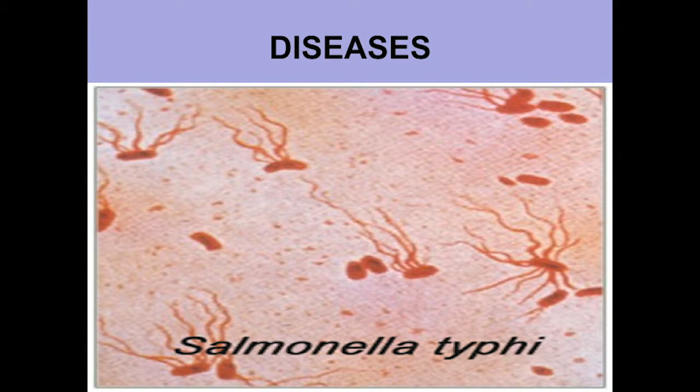But human health threat is the primary concern with septic systems, and that's why it's the Department of Health and Human Services, Division of Environmental Health, that has jurisdiction over septic systems in the state. Lots of things in wastewater are not nice, and we want to make sure we take care of those and they don't have any effect on people besides lake water quality.

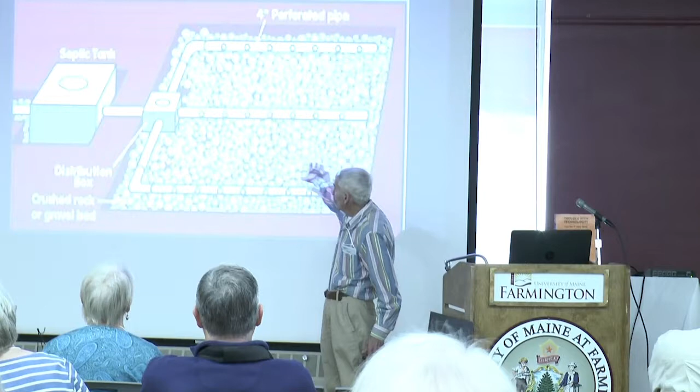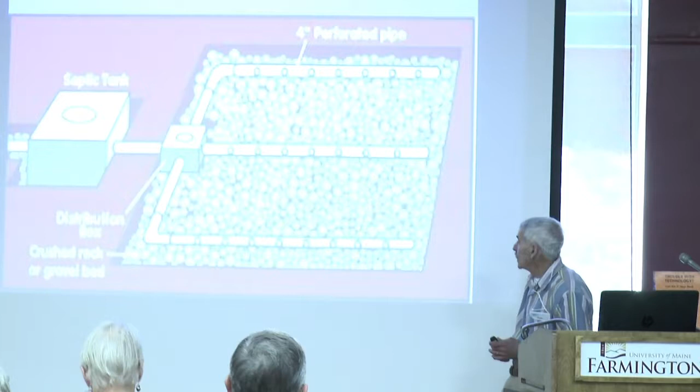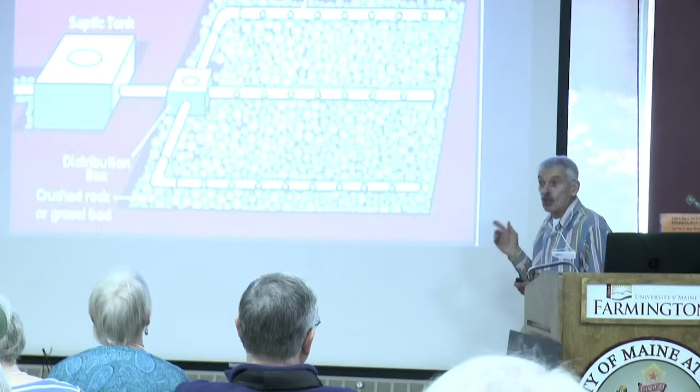Now, I'm sure most of you know what a septic system is. I'm going to go over briefly what they are because there's lots of different kinds of products out there today. A septic tank and a drain field are the two primary components. The distribution box spreads the water out over the drain field more or less uniformly. The standard drain field was always made with crushed rock. And the footprint is pretty big because the purpose of the stone in a drain field is what? Anybody know what it is?

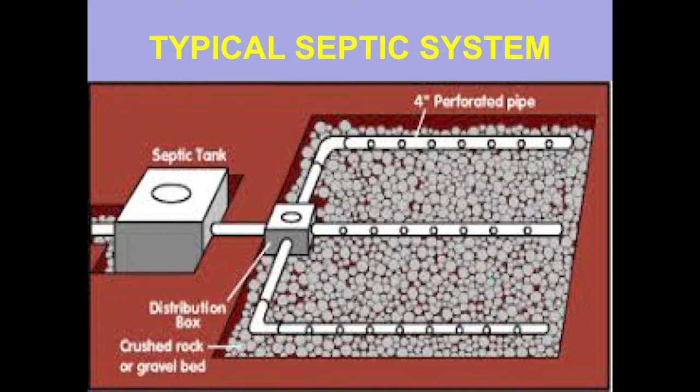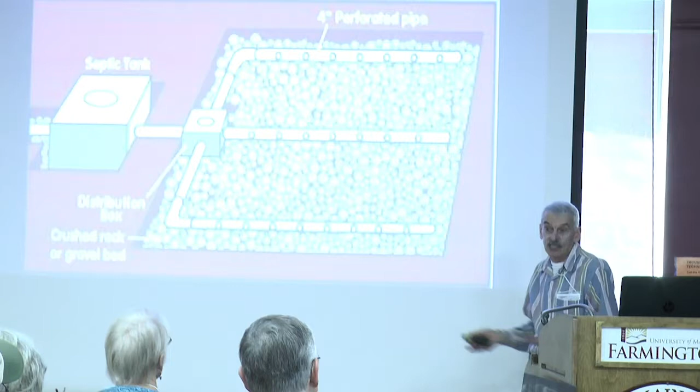What's that? To distribute. No, it's to hold the water, because a standard 3-bedroom home generates about 300 gallons of wastewater per day. But when is it generated? In the morning when everybody gets up and gets ready for school and work, and when they come home. So you put a lot of water out there, probably faster than the ground can absorb it, so you gotta have a place to put it. So in a stone bed, half the volume is stone and the other half is pore space. It's basically to hold water until it can drain into the ground.

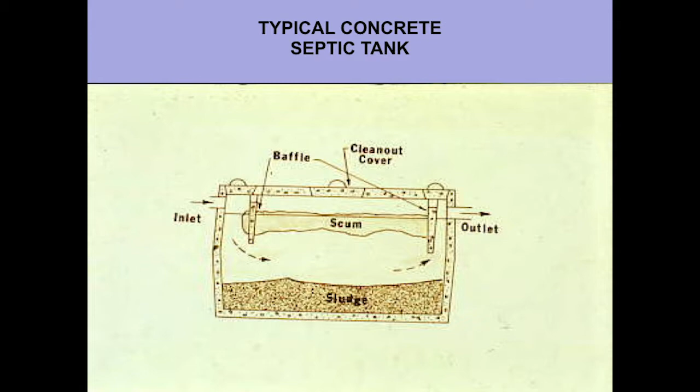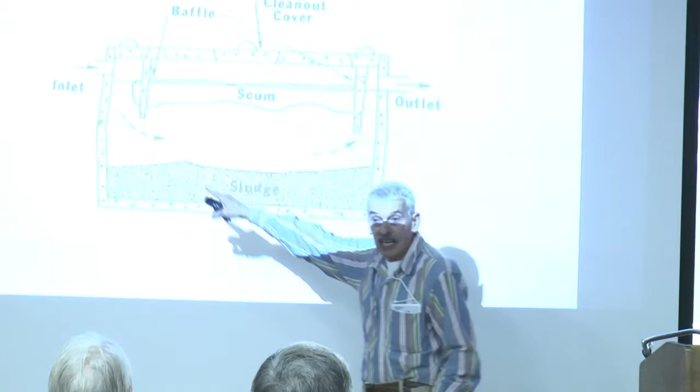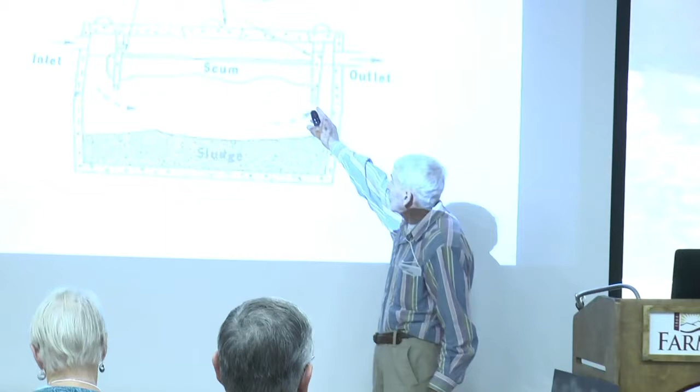Septic tanks have been around for a very long time, and they're very simple and very effective. Their purpose is to collect things in the water that are heavier than water and sink to the bottom, and things that are lighter than water and float to the top. There's a baffle on the inlet end, designed to slow the velocity of water down when it comes into the tank so it doesn't stir things up. And at the outlet end, that baffle is extremely important because if that's not there, all that grease and stuff goes out into your drain field.

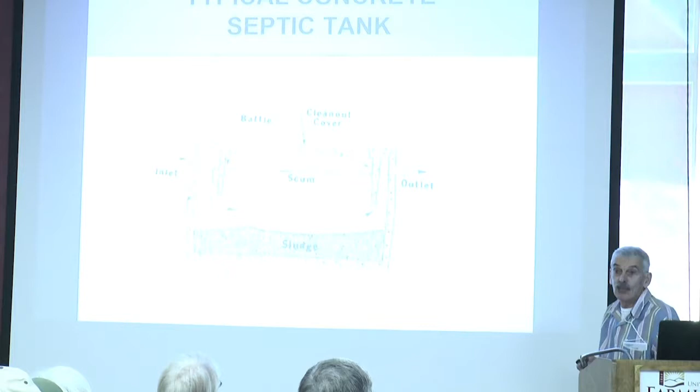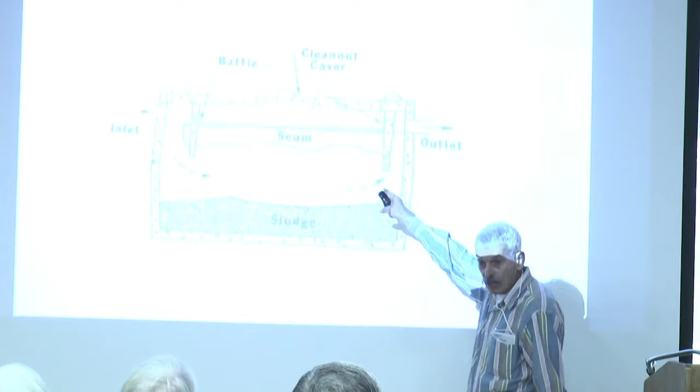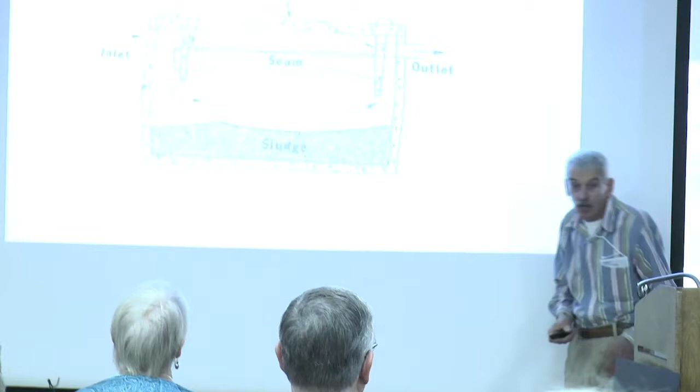So by all means, every time you have a septic tank pumped, make sure they check the outlet baffle, because that is critical to the functioning of a septic system. And if that is concrete and it corrodes and falls off, it's really easy to fix with 2 pieces of plastic pipe making it into a T. A piece comes out here, a piece comes up here, a joint goes up a little bit above here, and not a problem. But without that, your drain field will fail.

The other thing people don't understand about septic tanks is that they're not designed to remove all the particles in the waste stream. They remove a lot, but not all of it. For one thing, the effluent in the tank becomes anaerobic, and so decomposition is slow. So you need to pump it out every 3 to 5 years. If you don't do that, your $10,000 or $20,000 drain field system may fail. So pumping it out more often rather than less often is a great idea.

And they make plastic septic tanks if you happen to be in a tight spot that's hard to get at and you can't get a concrete tank in. And a lot of septic tanks these days have filters on the outlet end. The purpose is to remove some of the fines, particles that might escape out into the drain field.

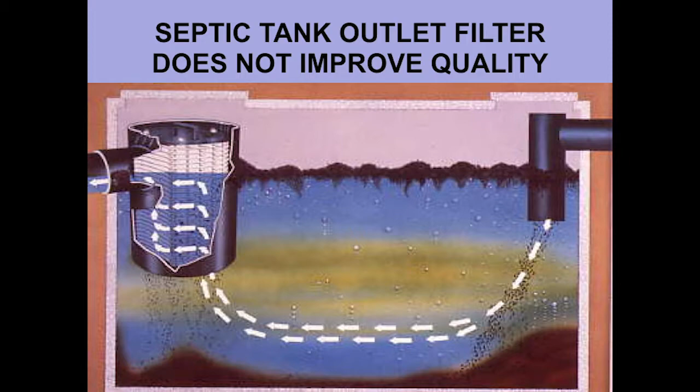My personal opinion of those septic tank outlet filters is mixed. If they put a filter in fine enough to really remove most of the particles, it would plug up so often that you'd have to have it cleaned constantly, and people wouldn't do that. So they're a little bit too coarse. I think if you understand your septic system well and how it works, then they're not as important, but they don't do any harm. And for most septic tank manufacturers, that's standard in the tank.

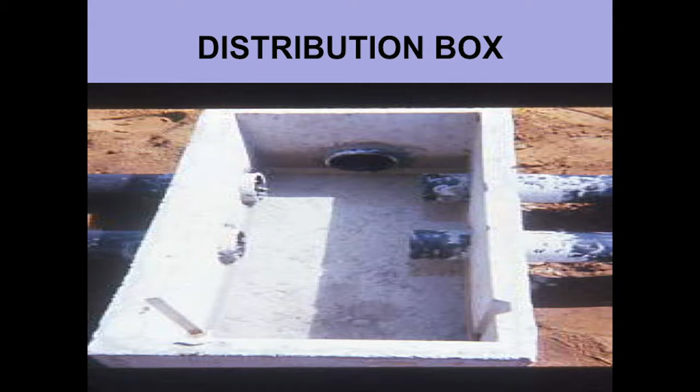And the distribution box, you know, it's designed so that water goes out each of the pipes into your drain field, hopefully equally. In reality, most of these distribution boxes tip a little bit, so they don't really distribute it equally, and it's really not that critical. In my opinion, their biggest function is an inspection port.

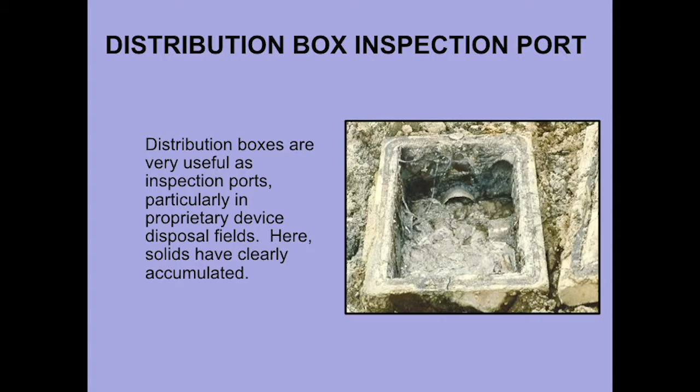There's not supposed to be grease and junk in these things. So if you've got a septic system that's made out of plastic chambers or concrete chambers or something that somebody can't dig a hole in to look at easily, if you get a distribution box and it's full of stuff, then you know you got a real problem. That's not supposed to happen.

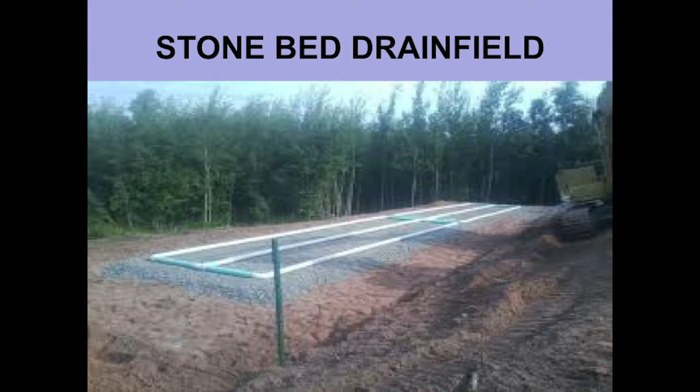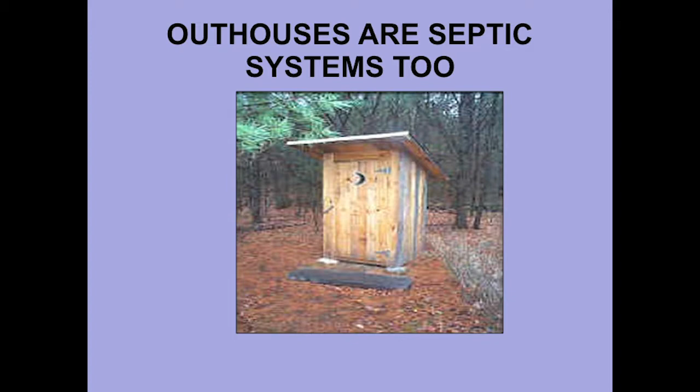This is a typical stone bed with the piping in it. Water comes in and goes over the whole footprint of the disposal field eventually. And a lot of people don't realize this, but that is a septic system. That's the same thing as a drain field for the black waste, and that works just as well as the drain field. In fact, it's a better system than a septic system drain field, because the way that contaminants move from one place to another is with water, right?

You gotta have water. Well, if you got this little building sitting up on top of the ground, so rain doesn't even get at it, then the stuff sits there and composts, and it's actually superior. So people say, all I have is an outhouse, I don't have a septic system. You have as good a septic system as there is, in my opinion. But that's only half your system.

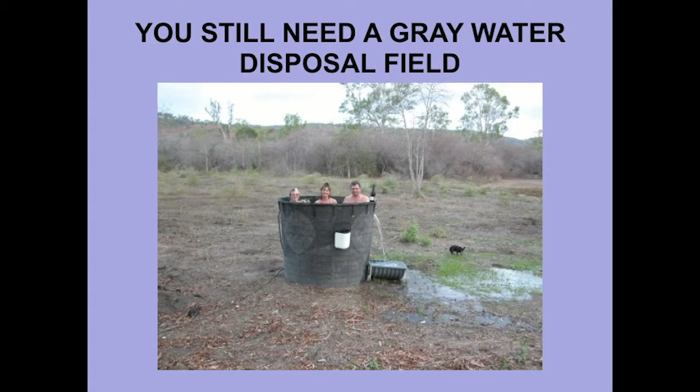You still got to get rid of the gray water, the sink water, the showers, the bath water, and that's probably not one of the ones in the septic system rules, but you still got to have something like that. The septic system design that we use today was first started on July 1st of 1974.

And we call it site evaluation because people are trained to go out and look at conditions and not do what we did back in the good old days, which was a PERC test. For a PERC test, you dug a hole in the ground, you filled it up with water, and you timed how fast the water disappeared. Believe it or not, if you dug the hole last year, it probably disappeared faster than it does this year because it's wet, or the spring, or the fall.

So with that system, if you went out in April and did a PERC test and it didn't pass, you said, well, I'll come back in August and do it, now it'll pass. And that doesn't work because your septic system has to be functional all year long. So today, we train folks to be able to look at soil colors and other features and be able to tell how it'll work all year, including in the spring when the water table is high.

The things that we look at are soil texture. Obviously, a septic system on clay soil is going to drain slower than on sand. We look at soil structure. Water goes through the soil through soil pores, and soil pores are created by soil structure. If you don't have good soil structure, you don't have a lot of pores, and the water can't go through the ground very easily. So healthy soil with good soil structure is really important.

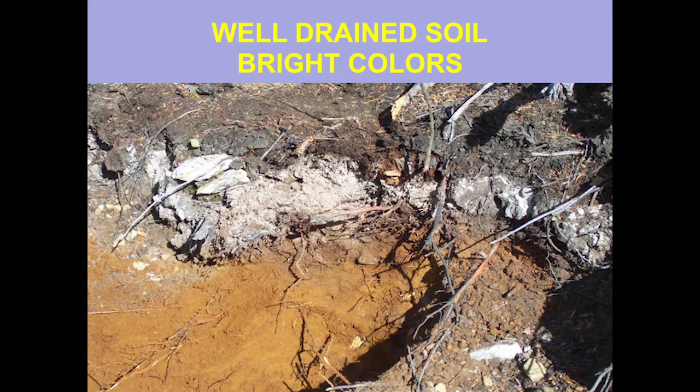And a little quick lesson in soil morphology. All of our soil in Maine, and pretty much most everywhere in the country, has a lot of iron in it. And if the iron is exposed to oxygen, it rusts. That's what that bright color is all about. It's rusted iron. So if you've got soil with bright colors and good roots, you've got a soil that's well drained, there's not a water table, that's a good one to put in for a septic system.

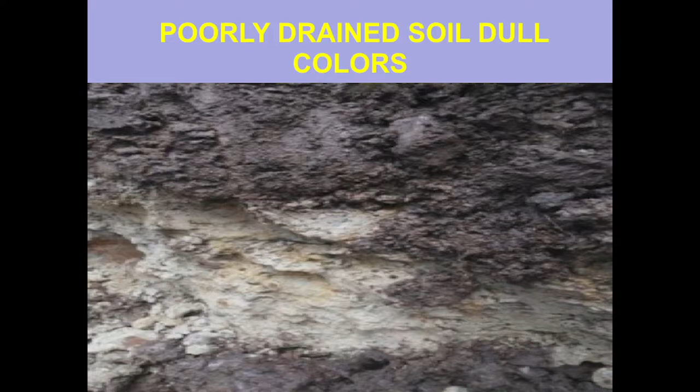On the other hand, if the water table is there for any length of time, microbes that are breaking down organic matter in the soil, they need oxygen. They get it from the soil air and the soil pores if they can, because that's the easiest place. If the water table comes up in the soil and it's not there for too long, there's oxygen in that water, that's the next easiest place for microbes to get it.

If you've got a soil where the water table comes and goes, then you get these gray spots with brown soil color, and I can tell you how long the water table is there by what is the predominant color. If it's more brown, then the water table's not there long, with just a few gray spots. If it's mostly gray with a few brown or red spots, it's wet a long time. That's how we can tell.

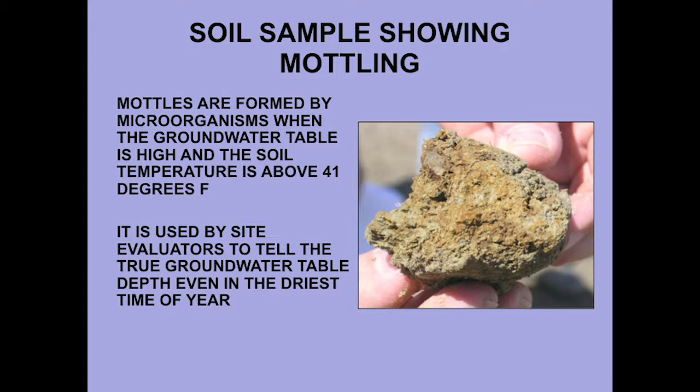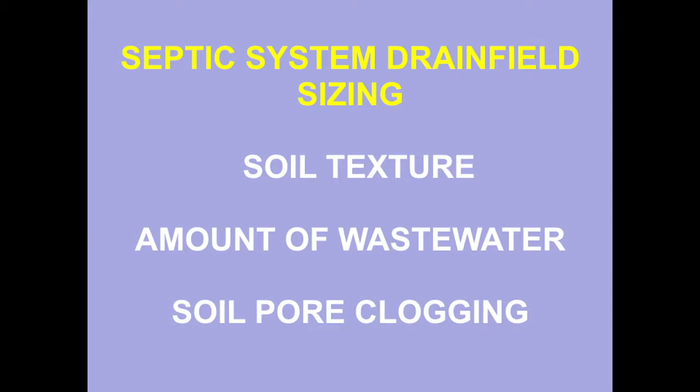For septic system sizing, there are 3 considerations that you have to be aware of. One of them is the soil texture. Like I said, clay soils, you need a big system. Sandy soils, you need a smaller system. The amount of wastewater being generated obviously matters. And then there's the clogging of the soil pores, because some particles escape from the septic tank, and the microbes that are decomposing that organic matter form what we call a biomat, which causes some clogging of the soil.

In my business, it's called the long-term acceptance rate. That's why you need a big footprint to put not that much water into the ground, because it gets this biomat. And I can tell you the biomat is a very important component for treating wastewater, because it really works hard, and probably 80 to 90% of the wastewater renovation is by that biomat. And I'll be talking about that a little bit more as I go on in this talk.

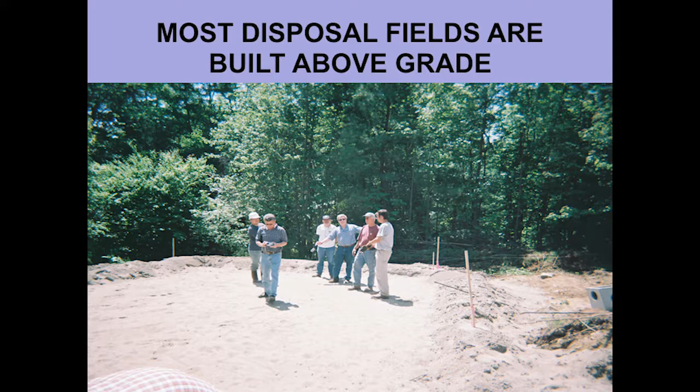Most disposal systems in Maine are built above the ground because we have shallow depth to hard pan, bedrock, or water table. Traditional stone beds are being replaced today more and more by what we in the business call proprietary devices. And I'm going to show you what some of those are, because they use a smaller footprint and they can go in a smaller area, which is really pretty important.

Another thing is that in a stone bed, as I said, half of the volume of the stone bed is solid stone and the other half is pore space. Well, if you've got a concrete chamber, all the area underneath it is available to hold water, so you can hold more water in a smaller area. And one of the other things that happens is some of these proprietary devices help reduce the organic material in the waste stream. If it's cleaner water, it can go into the ground quicker, so you need a smaller footprint.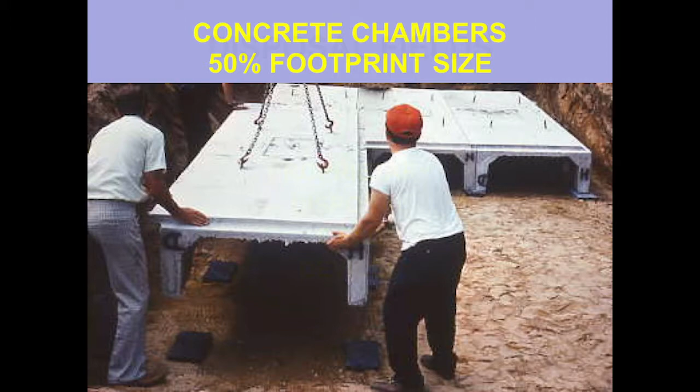So some of the proprietary disposal field devices, concrete chambers, have been around for a very long time. And now you'll see more often these plastic chambers that are very lightweight, and not only can they hold water without soil or stone reducing the volume, but you can put them in rows and step down the hill.

So water comes into this row, fills up if it needs to, goes out this pipe into this row, and if it needs to, can come down and down this row. And by doing that, you can have a sloping site with 3 rows and save a lot of fill. If it's a stone bed, it has to be perfectly level, so you'd have a lot of fill, and it looks like a ski jump, so people like these because they take up less room.

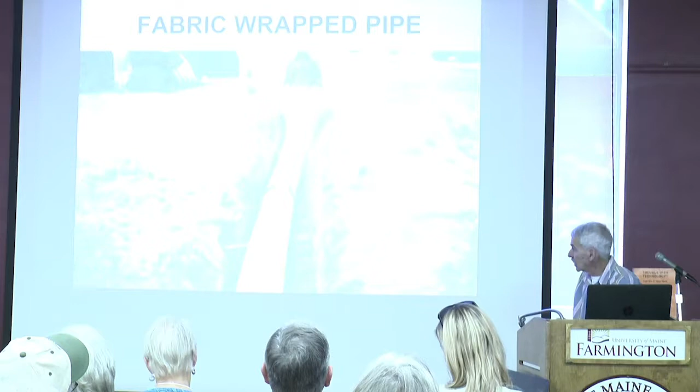Fabric wrapped pipe is another proprietary device. It works like the plastic chambers, and they can be stepped down the hillside. The concrete chambers, plastic chambers, and these fabric wrap pipes will take up about half as much room as a stone bed, so they fit a little easier and take a lot less fill, which is good if you're on a small lot.

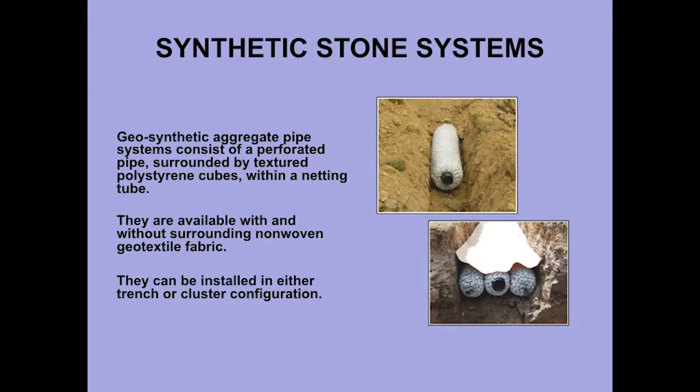And that's showing it stepped down the hill. Here's one that I get a kick out of. They've got a pipe in here, and this is styrofoam beads with a little netting material around it. So basically, you're getting pipe and stone in one package instead of putting stone around it yourself. I'm not sure how many people use those.

There are other proprietary devices that require only 25% of the footprint of a stone bed, so they can really fit in a very small area. They are very popular around lakes and other small lots. Eljen In-Drain is one of those kinds of devices.

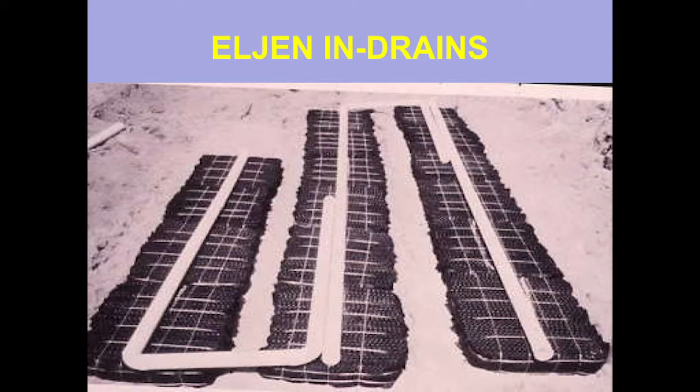It has fabric that weaves up and down in between like egg carton projections. What happens is the wastewater goes down, and if it hits the bottom of the ground, like in the stone bed, it can plug up the pores, as I told you, and that slows the water down. Once the pores start getting plugged, a little bit of effluent will pond on it, so it's anaerobic, and that biomass doesn't really decompose.

While with this fabric going up and down in this product, when the wastewater goes down, particles cling to that fabric that's sitting up like this, and so the water drains down, exposed to oxygen, and that decomposes that organic matter. So by the time the water gets down to the ground, it's pretty clean, and because it's pretty clean, you can put it into a smaller footprint than you can if there's a thicker biomat. So its biomat forms in the product itself, and that's why it can be such a small footprint, and they work pretty well, I have to say.

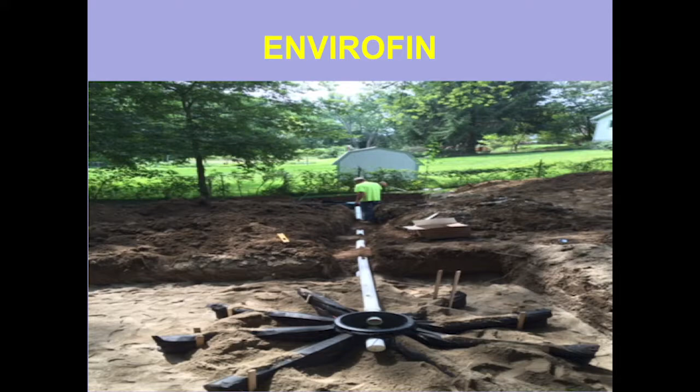There's another thing called EnviroFin that looks like an octopus, and water goes out into each of these little fins. It's got fabric on it again, so the water comes out and drops down, but particles collect on the sides, and that also decomposes the material, so you have cleaner water going out into the ground. So those things can be put in pretty small footprint areas.

Do any of these new design systems allow being any closer to the lake? No. Do they change that specification at all? No, they don't. I'll get on that subject in just a minute.

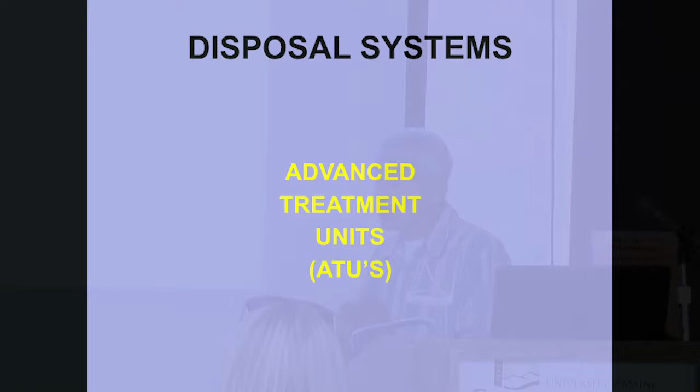The next subject, called advanced treatment units, is what the state septic system program requires if you're going to be putting in a system that's closer to the lake. You can't do this for first-time systems, meaning you never had one before — those have to be 100 feet from the lake. For replacements, you do the best you can, but if you have a replacement system that's going to be closer to the lake, river, or stream than 100 feet, they require you to put in what's called an advanced treatment unit.

And these are basically just like your commercial treatment plant — that's what they are, a little packaged treatment plant. There are a few systems out there that just introduce oxygen into the waste stream, which helps break down organic matter, but some of these actually look like little packaged treatment plants. Their primary function is to reduce the BOD5 and total suspended solids, so it's cleaner water coming out. They can get rid of some bacteria, and they can also reduce the nitrogen if that's desired.

Excuse me, what's a BOD5? Pardon? BOD5, what is that? Basically, it's just the organic material that's going out into the waste stream, so if there's no organic matter, it won't plug up the system as quickly.

So they allow you to put in a very small footprint, 25% of a stone bed, but they also don't have a biomat. And like I said, in my opinion, the biomat is a good thing in that it provides a lot of treatment of the wastewater stream. The price ranges for a lot of these is probably in the $2,000 to $5,000 range. And there's one that's $20,000 — it's reverse osmosis. The people who sell it will stand with a glass on the other side of the membrane and drink it, but I'm not there yet.

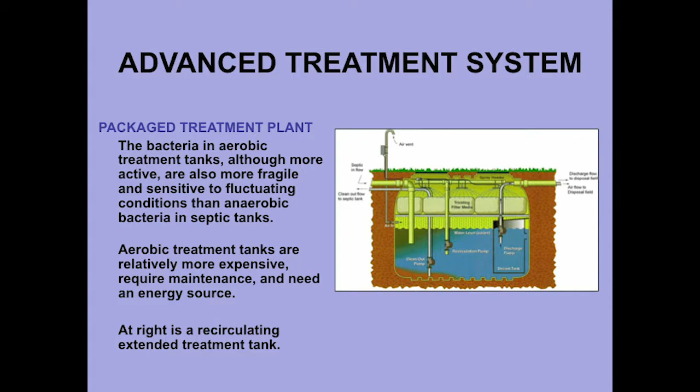So basically, an advanced ATU is something you can get installed in a septic tank, a 1,000-gallon septic tank. What they do is pump up water and spray it down onto bags of foam or beads, where the microbes attack the waste stream. It drips down and keeps doing this until the water's pretty clean, then it gets pumped off to the drain field, removing a lot of the organic material from the waste stream.

This is just showing you another one that pumps air into the tank. If you put oxygen into it, you'll get more decomposition.

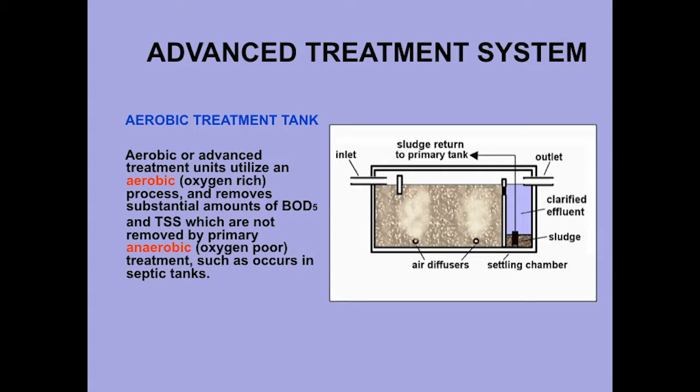It's very critical that if you have one of these advanced treatment units, you have a maintenance contract. The state requires that for a period of 2 or 3 years, but in my opinion you really need to do that indefinitely, because nobody knows how to maintain these things. If they don't get maintained, you're probably going to have it fail, and if it fails, it can be a pretty expensive price tag.

This gives you an idea of one of those advanced treatment units: the BOD5 and total suspended solids, which are the organic components, show a 95% reduction. They can get rid of a lot of the nitrogen and even the coliforms. What you don't see up there is phosphorus and viruses, and as we know, that's important in lake watersheds.

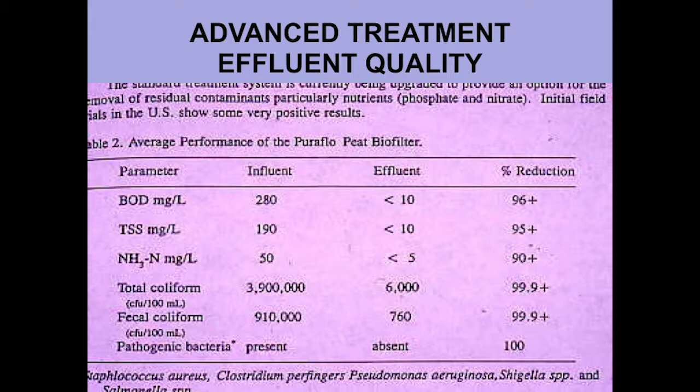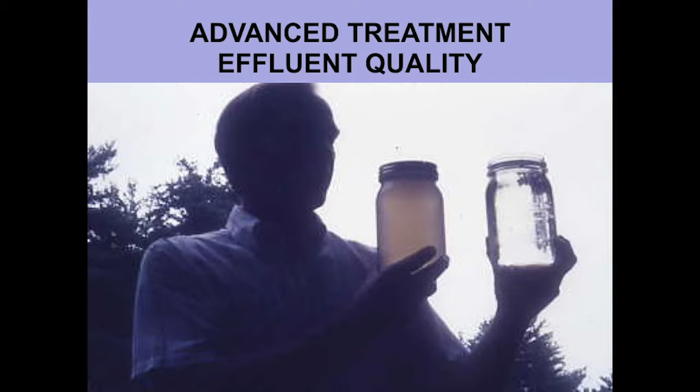This is what the water looks like after it comes out of one of those advanced treatment units compared to coming out of a regular septic tank. It looks like there's a world of difference, and there is, as far as clogging material goes. But as far as I'm concerned, it's kind of deceptive, because you think that's great, but it's maybe not as great if you're in a lake watershed.

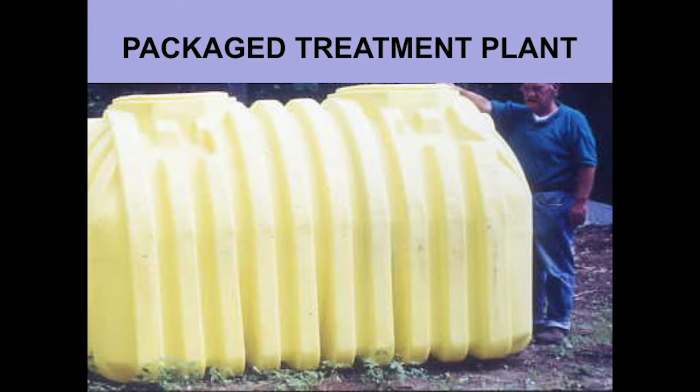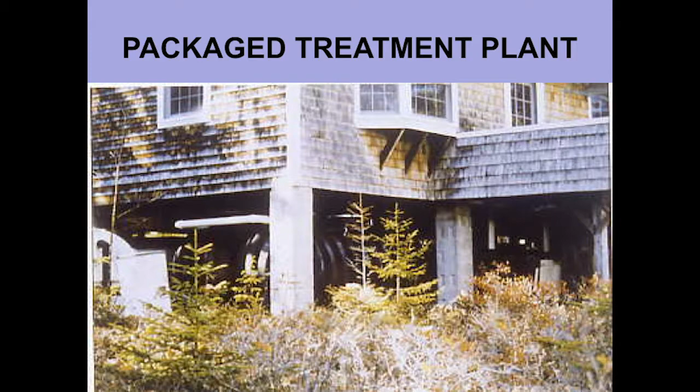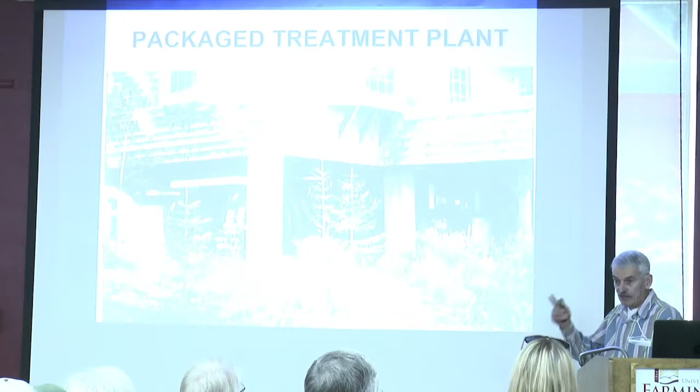These units can, after the season's over in the fall, just keep pumping the solids until they break it down, so you don't even have to have the septic tank pumped out on the islands. It just works itself until everything's clean, and then they shut off for the winter.

This is an emitter for drip irrigation type systems, which are allowed. They can either be put on top of the ground, underneath bark mulch or wood chips, or put shallow into the ground. There are 2 different kinds of systems that are out there.

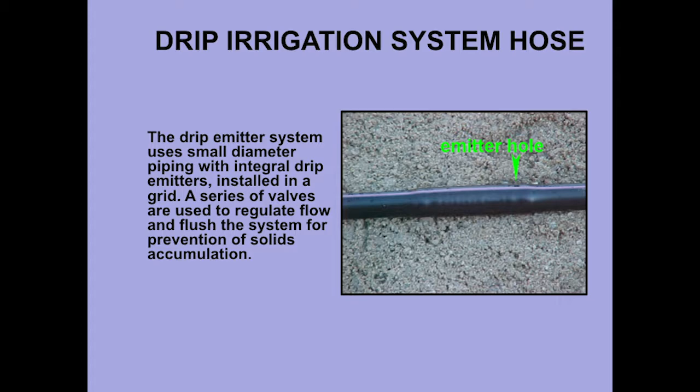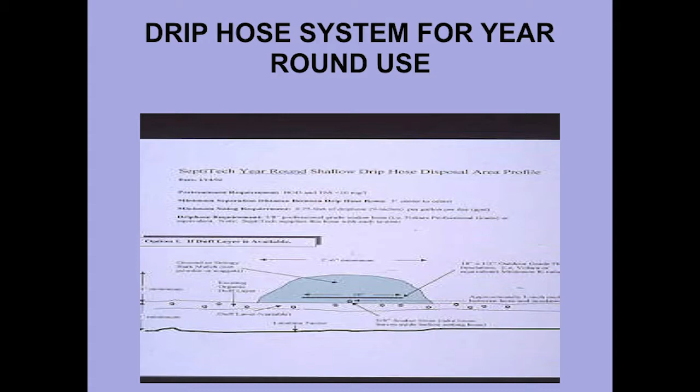This is just showing one that has - let me get a better picture. This is the network of piping for one that's going to be covered with soil. And this is one that actually has bark mulch; it runs off down through there, and that's what that system looks like.

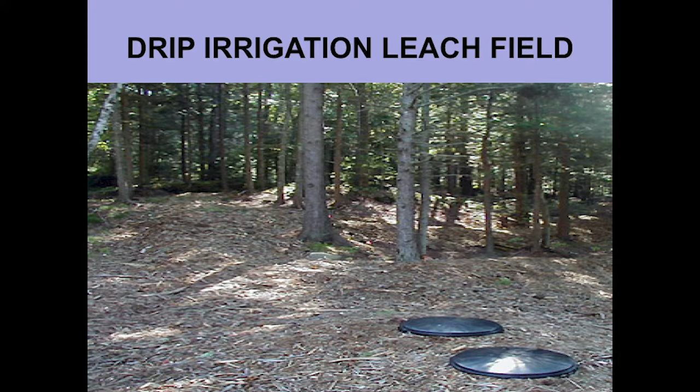So if you're on an island and don't have much room to work, you can put one of these things down, cover it with bark mulch, and they work pretty well.

There is one - when I went to the Maine Association of Site Evaluators annual conference this March, I talked with all the vendors out there. One of the vendors said they have a product that will do that, but it's not available in this country yet. It's available in Europe, and it uses some kind of iron-aluminum slag material that pushes the water through to remove the phosphorus. Apparently it works pretty well for an extended period of time. I told them that if they made that available in this country, they could get a lot of business. So hopefully they're looking into it.

I mentioned about the viruses.

Phosphorus and viruses, as far as I'm concerned, are not a real big concern if the disposal field is installed in the topsoil layer or in a fine textured soil. In all of our soils in the state of Maine, even our sands and gravels, when the glaciers first melted and left, the ground was bare for a long time before it got vegetated, and there was a lot of wind that blew a lot. So even our sand and gravel have a topsoil layer. It can be 6 inches to 2 feet thick of wind-blown, very fine sand and silt, that does an excellent job of providing treatment for wastewater.

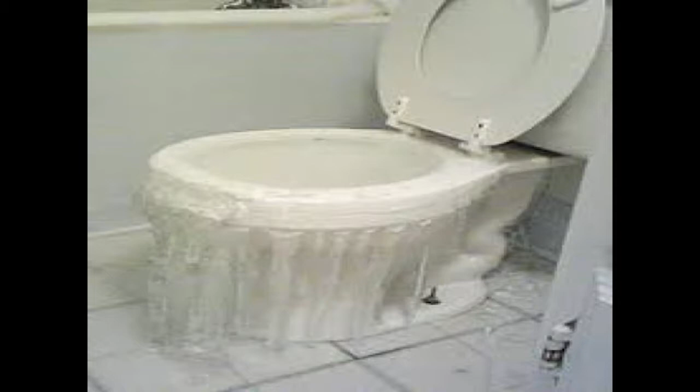Hydraulic failures are probably our most common type of problem. Short circuits is the one that nobody even thinks about, but is probably the one that's the biggest problem. Like I said, plugged pipes are not really an environmental threat - if your pipe plugs up and your toilet runs across the floor, you're probably going to fix it, right? But the hydraulic failure is the one that happens most often and can be an environmental threat depending on where it is. If it's on your front lawn and effluent comes to the surface, you're probably going to fix it because it doesn't look good, it smells bad, and the dog will roll in it and come in the house. If it's out back in the bushes, you may not.

So the three reasons why it can fail hydraulically are because it's not designed properly, it's not installed properly, or it's not maintained properly. Design and installation are not a problem today, generally speaking, because we have lots of training out there.

It's the maintenance part that's really an issue that people don't understand. I brought copies of what I call septic system user notes, what I've accumulated over my career in understanding about septic systems that homeowners should know. Everybody who has a septic system should read it and understand it.

What are the signs of a hydraulic failure or other type of failure? Like if, as part of a lake association, a homeowner says they think their septic system is failing, can you take a look at it? You'll have a soft, spongy, soupy thing that you'll see. Those are pretty easy to find.

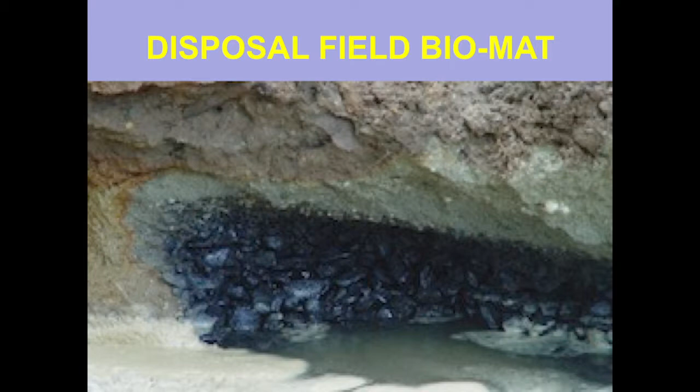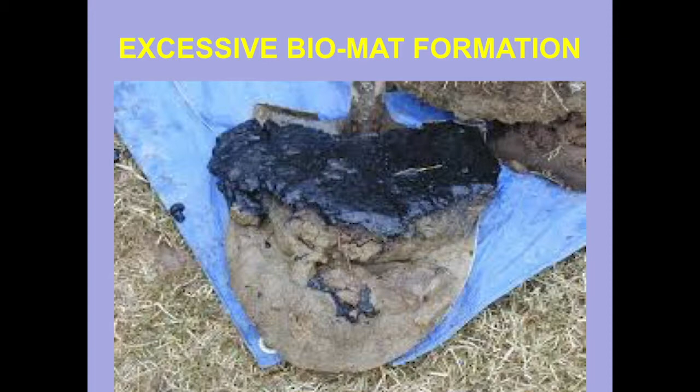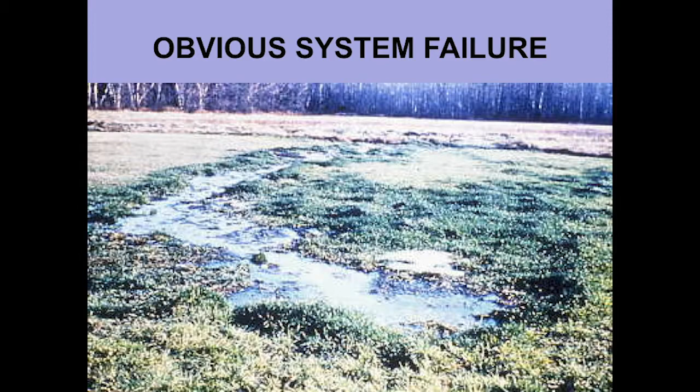What I'm going to show you now is the biomat that forms in a typical septic system. This is a biomat that got too thick, which causes hydraulic failure. So it's good to have one, but you don't want it too thick. This is plastic chambers — they got too much stuff out into it because the septic tank didn't get pumped. That sort of stuff is what you look for, and it's easy to detect.

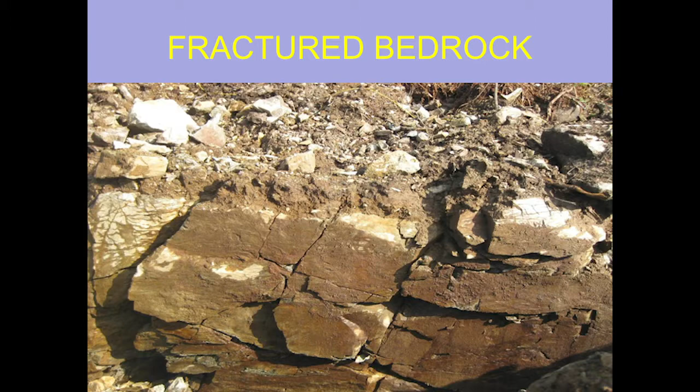But what you don't see is the short circuits. If a septic system is installed on top of this and you get cracks, the wastewater just goes right down to the groundwater table with zero treatment. Or if it's in sand and gravel and it goes down into this layer, it's gone. That's the one that's the most concerning.

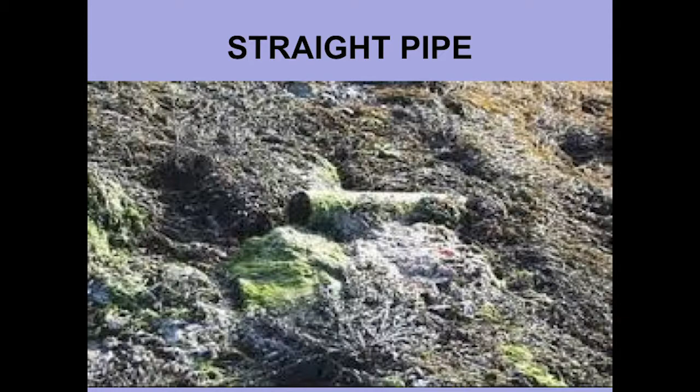I've been working with DEP and the state septic system program folks to impress upon them the need to incorporate something like this for septic system inspections in sandy, gravelly, shallow bedrock soils in the shoreland zone, because these can be a smoking gun you don't necessarily know is there. But it's a little tricky to get that to happen. Straight pipes, we don't like those. Dye doesn't work unless you get a straight pipe, unfortunately.

I want to talk a little bit about septic system maintenance. Again, get a copy of my septic system user notes, because a septic system can cost you $15,000 in the shoreland zone. So if you don't maintain what you've got, the replacement can be very expensive and ugly. Pump your tank out every 3 to 5 years.

If that's more often than you needed, that's better. It's like having your oil changed in the car — you can do it every 30,000 miles and hope, or you can do it every 5,000 or 6,000 miles. Maybe that's overkill, but the car's still running.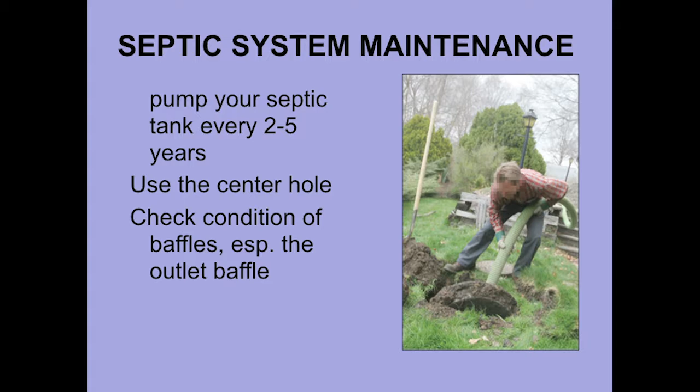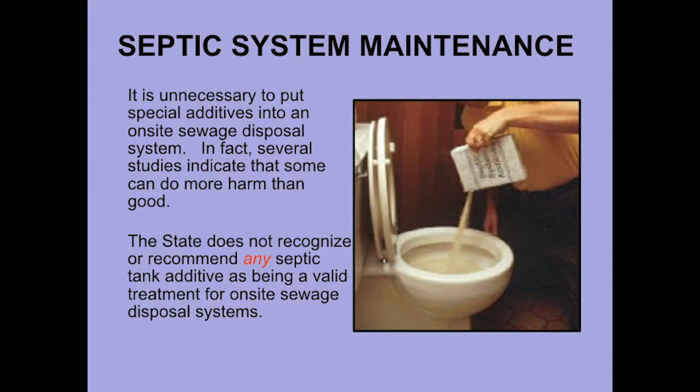Rid-X, that sort of stuff — don't ever put that down your tank. There is nothing recognized in the United States of America that will help your septic system work that you can add to it. Nothing. If you're lucky, it won't do any harm. And if you're not lucky, it'll cause so much biologic activity that it'll put solids out in your drain field and cause them to fail. I've seen quite a few where that's happened, so don't put it in.

Does that include a package of yeast? Yes, don't put anything in. It's competing with what belongs there, so nothing.

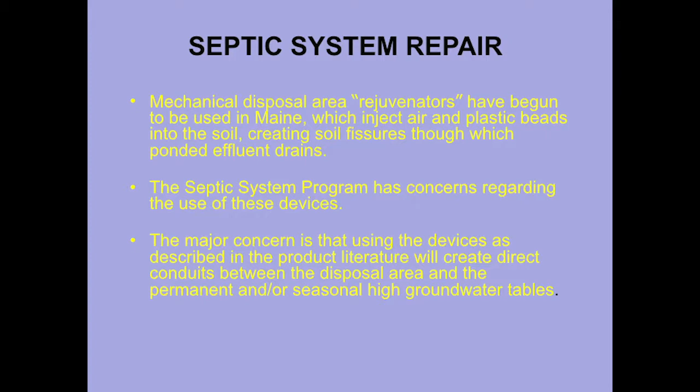There are several ways you can repair a failing septic system, but most of the time, if it's hydraulically failed, you'd have to add oxygen and reduce the amount of usage, which might bring it back — but generally speaking, you've got to have it replaced. I did mention about the short circuiting.

DEP is proposing perhaps to come up with an advanced septic system inspection program. They'll be looking in the system for biomat, and if you've got no biomat and you're in sand and gravel or fractured bedrock, you probably have a short circuit — something you need to be aware of.

So I mentioned that if you want to know what you have for soils in your lake watershed area, there's a thing called the Web Soil Survey. Anybody here ever heard of the Web Soil Survey? Good. Basically, you can Google Web Soil Survey, click on it, click on the home page, click on the start button. You can put your address in and find out what the soils are in your lake watershed area. If you've got shallow to bedrock soils, or sandy gravelly soils, those are hot spot potentials.

And if you've got old septic systems in those areas, those are things you really want to be paying attention to. So if I had to rate which ones you want to be most concerned about: there are systems out there that have been in since 1974. They almost always should just be removed, because if they're still working, it's only because they're probably short circuiting or not used. Pre-1995 is the next one, because in 1995 the septic system rules required putting in some finer textured soil around the disposal field if it's going into very coarse sand and gravel. So those are the highest priority: advanced treatment systems that are in sandy or shallow soils right near the lake. That would be my priority list.

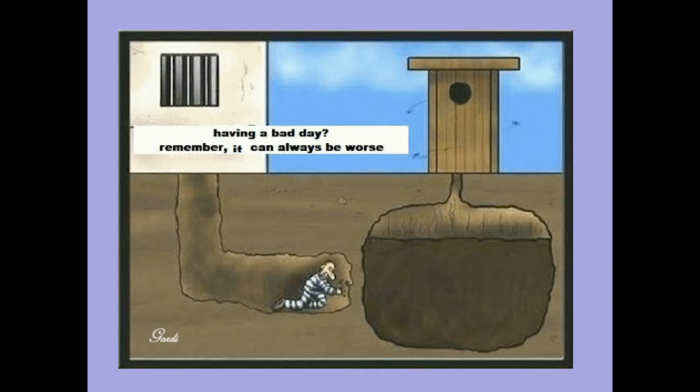So I just had one parting thought: things can always be worse.